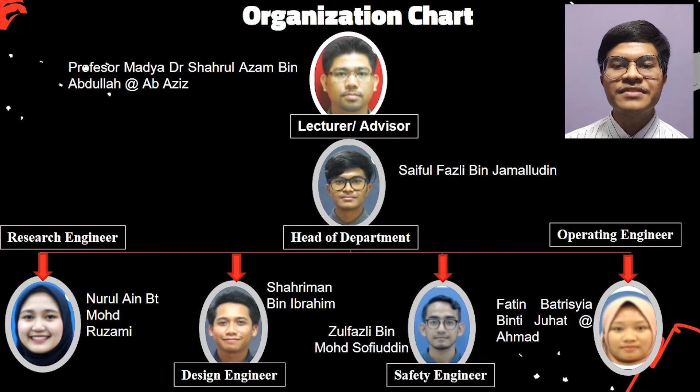I am Saiful bin Jamalludin as the head of the department. Nurul binti Muhammad Ruzami as research engineer, Shahriman bin Ibrahim as design engineer, Zulfazli bin Sofiuddin as safety engineer, and Fatin Batrisyia binti Juhat as our operating engineer.

Okay, I will explain briefly the job scope of every department. As the head of the department, I need to distribute the work among the members and assist them to follow the Gantt chart, so the work runs smoothly.

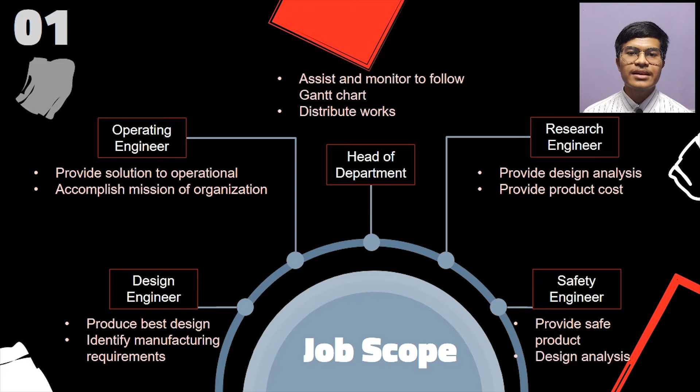Next, the research engineer needs to provide design analysis from the chassis and its production cost. For the safety engineer, he needs to ensure the chassis is safe to use by always monitoring the design analysis. Design engineer needs to identify manufacturing requirements and produce the best design for the chassis. Lastly, the operating engineer needs to provide solutions to operational issues and accomplish the mission of the organization.

Hi, my name is Ain and I would like to share about our chassis. For the selection of material, we are using mild steel as it is most used for terrain-use vehicles like ATV. Meanwhile, as for the design of the structure, the chosen design is selected out of 3 choices. The evaluations were done based on the characteristics, as the best design has the highest mark.

After that, our part has a good safety system as the main focus, which means the durability of the structure is really important in producing the best chassis for agriculture use. As it becomes the main part, it must be able to support others excellently without disturbing other components from functioning properly. Then our chassis is able to withstand obstacles as it will face different terrains which require it to be strong and durable.

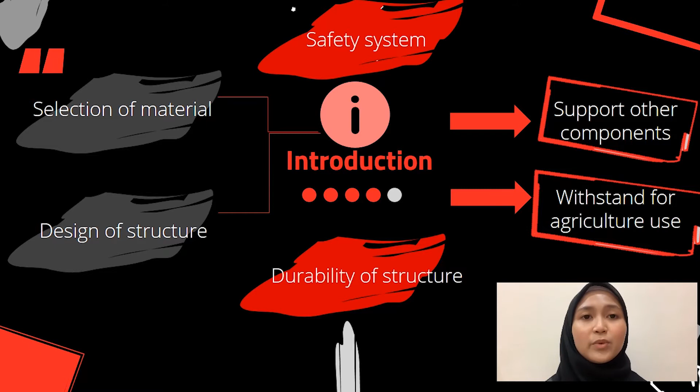So it is clearly stated that the user has a problem choosing the best design and finding the best material. Besides, the problem for this project is that the cost for making the part may exceed the placed budget along with all the required characteristics for the best chassis.

Therefore, the purpose is to allow for terrain use which is strong and suitable, for maximum yield strength, which is 2.2 times 10 to the power of 8.

Most of the users are from the baby boomer generation. Since they are more exposed to a high risk of getting injured, the safety of the product has become their main priority. So our chassis is the most suitable as the safety factor is more than 3, which promotes high safety to the user.

Next, the modulus of elasticity for our chassis is 210 GPa, which can support others greatly and can withstand high loads with very small deflection.

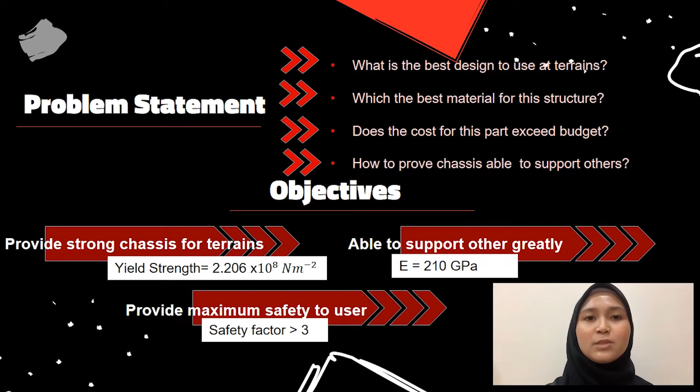Hi, Assalamualaikum. My name is Zulfazli and I am here to talk about our benchmarking based on the criteria needed for a perfect ATV transplanter chassis. So these are the designs we generated.

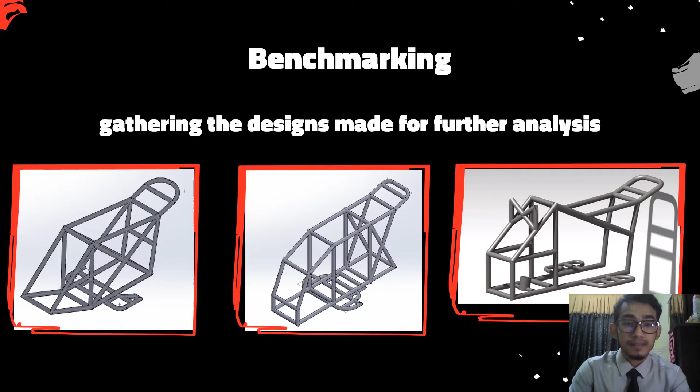Let's break this down quickly. The first one is much easier to fabricate and much lighter compared to the others. Design number 2 is more aesthetic and rare since it is one of a kind, and has a medium number of parts to weld, so it is not too complicated.

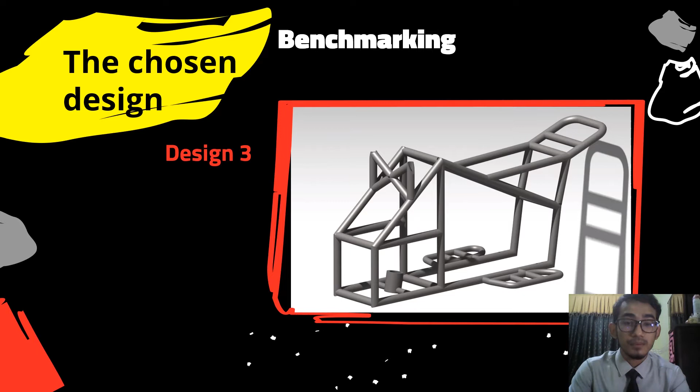Moving on to the chosen design, it has a long compartment and structured base to fit the engine in, making it more comfortable. It also has a pair of footrests to support that comfort point. Looking at the Pugh chart, the selected design scored massively, plus 17 points, by setting the important criteria as the datum. As the design usually outscored its rivals, we assume it is an easy choice.

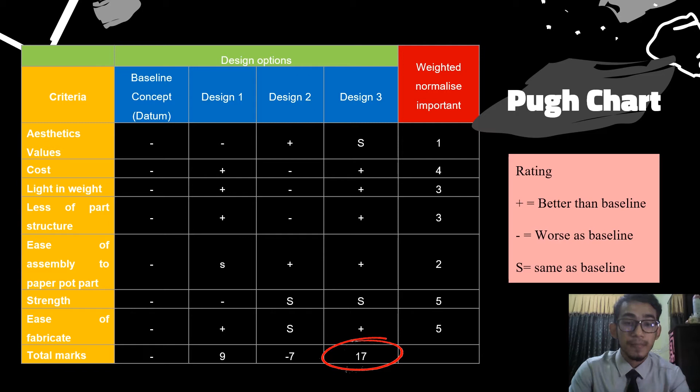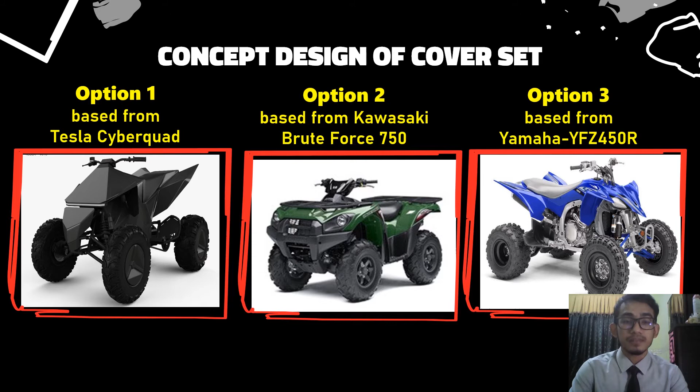The Tesla looks much more suitable for agricultural purposes, and with its simple design, it is also easier to fabricate, indirectly reducing the cost. The Kawasaki also has a sleek and sporty design, but they are much heavier compared to the others.

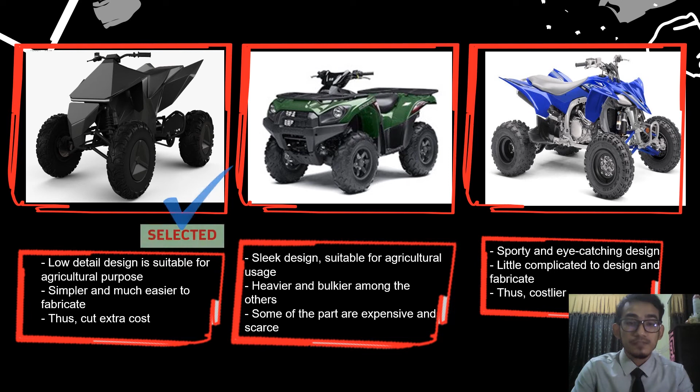The last one is Yamaha, which has a sporty design and looks very interesting, but this design is too complicated and will be much costlier to fabricate. So by that case, we've already made our decision and we are going with the best design of them all, which is the Tesla Cyberquad design.

This will be the conceptual design for our ATV transplanter cover set. Well, I think that's everything from me. Thank you.

For the product design specification, the chassis must be able to withstand forces used in terrain like agriculture use. The structure of the seat also needs to be ergonomic so workers can do the job for a long time. The cleanliness of the structure must be ensured to make the chassis maintenance-free and usable in the long term. For safety, the assembly for the chassis must be secured and able to withstand force when assembled with other parts.

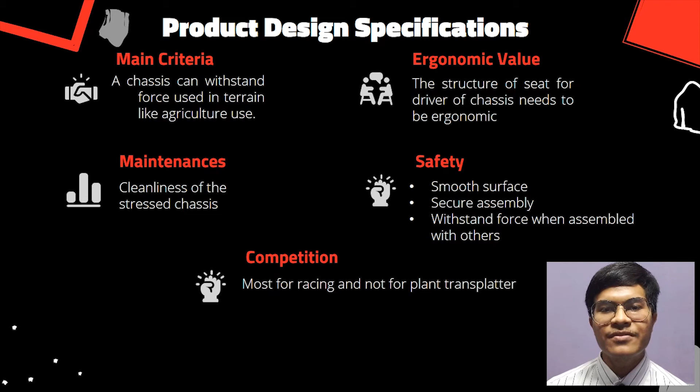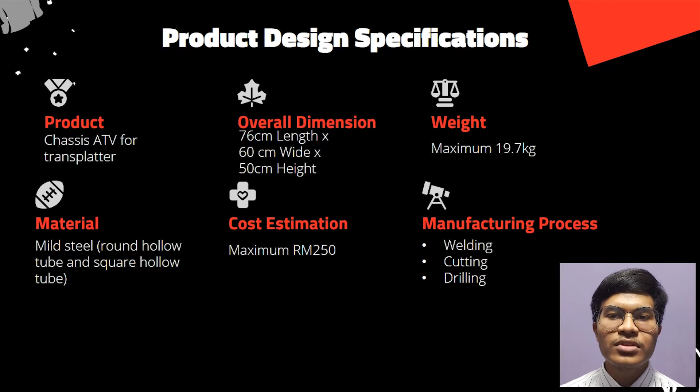For the competition, most ATVs are for racing purposes and not for transplanter use. The product produced in this department is the chassis for the transplanter with a maximum weight of 19.7 kg, dimensions of 76 cm length by 60 cm width by 50 cm height, and the material used is mild steel, round hollow tube and square hollow tube. Welding, cutting and drilling are the manufacturing processes, and around RM250 is the maximum cost estimation for the chassis.

Alright, I will continue our presentation for the next slide. Since my role for this project is design engineer, I will explain more about the design for the chassis.

First, for the stress analysis, we made a few analyses on this 3D chassis frame model to find whether this design is suitable enough for our ATV or not. There are 4 types of analysis conducted on this 3D model chassis frame: static analysis, impact analysis, turn left static analysis, and turn right static analysis.

All the analyses were conducted using SolidWorks software, since this software can give the best result and highest accuracy for the information needed among other 3D model design software. Furthermore, SolidWorks is also the easiest software to use since it is updated every year, so it's really up to date based on industrial needs.

For the weight of the chassis, in SolidWorks we can set the type of material to be applied to our product. We decided to choose mild steel since this material is strong and durable. By using the mass properties feature in SolidWorks, we finalized the weight of the designed chassis frame at 19.747 kg, which is around 20 kg conclusively.

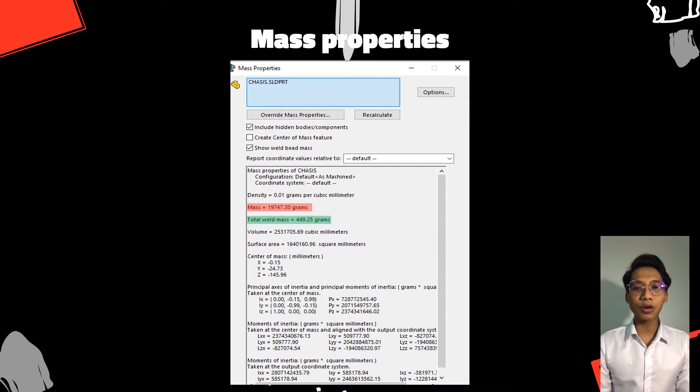By using mass properties also, we can find the total weight of weld bead produced from the welding process, which is 449.25 grams. This information can help us calculate the theoretical analysis for the chassis.

The first analysis conducted is static analysis. Basically, this analysis is to determine the critical part whenever the weight of the engine and rider are applied on the chassis frame. The fixed conditions are applied at the bottom points of the chassis, since it is the closest part to the ground.

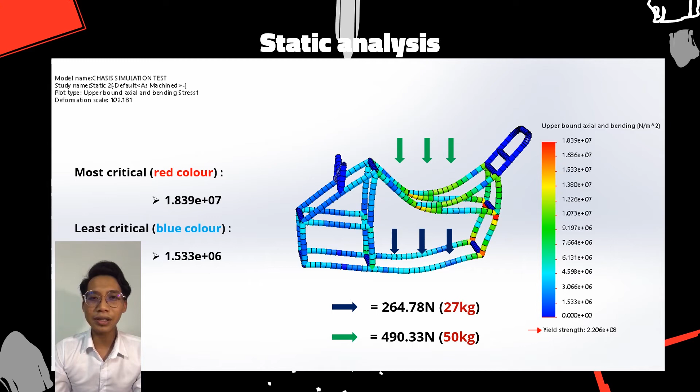The load of the rider and the engine are distributed at the seat and engine part, which are 490.33 newtons and 264.78 newtons respectively. The result shows that the area bounded by red color indicates the most critical stress, at 1.839 times 10 to the power of 7 newtons per meter square, while blue indicates the least stress, at 1.533 times 10 to the power of 6 newtons per meter square. Only around 5% of the total chassis part is at the critical point, shown in red.

The second analysis is impact analysis. Commonly, impact analysis is used to determine the critical part of the chassis involved whenever the ATV hits any obstacles from the front of the chassis.

The fixed conditions are applied at the front of the chassis to act as the obstacle, while the load distributed from the transplanter, which is 400 newtons, is applied at the back tail of the chassis. The result shows that the area bounded by red color is at the most critical part, at 1.152 times 10 to the power of 7 newtons per meter square, while blue indicates the lesser stress, at 9.599 times 10 to the power of 5 newtons per meter square. Only 5% of the chassis is at the critical point, indicating the critical part from the transplanter whenever force is applied.

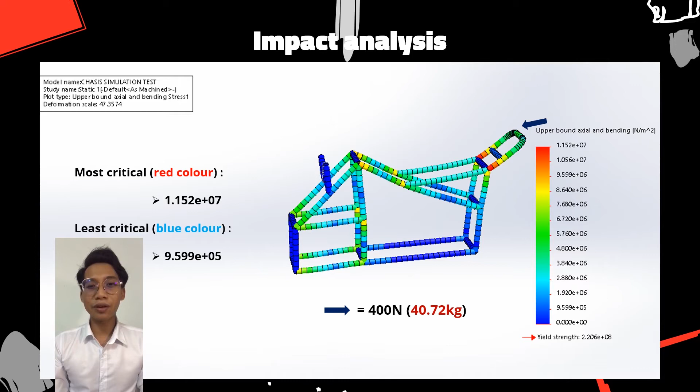Lastly is the turn static analysis. For the analysis, we perform two conditions: when the ATV turns right and when the ATV turns left. We assume 260 Newton force applied at both sides of the front chassis. The result for both analysis is quite similar since the design for both right and left side is the same.

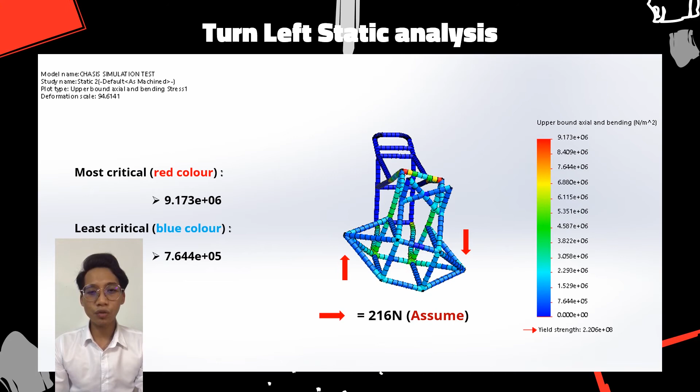For turn left analysis, the red color that indicates the most critical part is 9.173 times 10 to the power of 6, while the blue color indicates the least amount of stress, which is 7.644 times 10 to the power of 5.

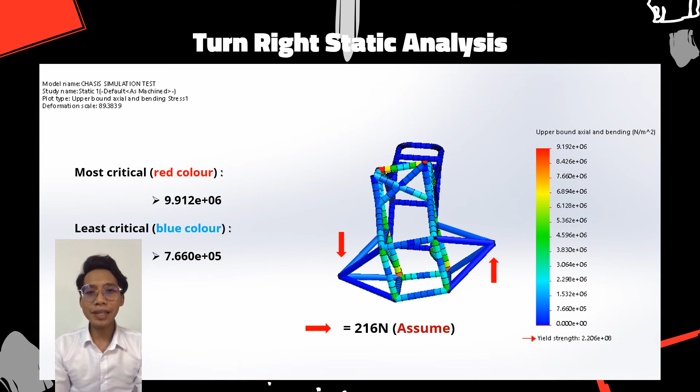For turn right analysis, the highest and critical point is at 9.192 times 10 to the power of 6 Newton per meter squared, while the least amount of stress is 7.660 times 10 to the power of 5. The yield strength of mass applied for all analysis is 2.206 times 10 to the power of 8. As a conclusion, all the analysis was conducted successfully.

Now we move to the calculations. We prove the ability of our product. It is assumed that the speed is 65 km per hour and the force is 193.257 Newton.

From here, the value of deflection is identified at a certain time and speed. Besides, we are able to obtain the work done and the allowable force before it fails. Now, the calculations are for two sides.

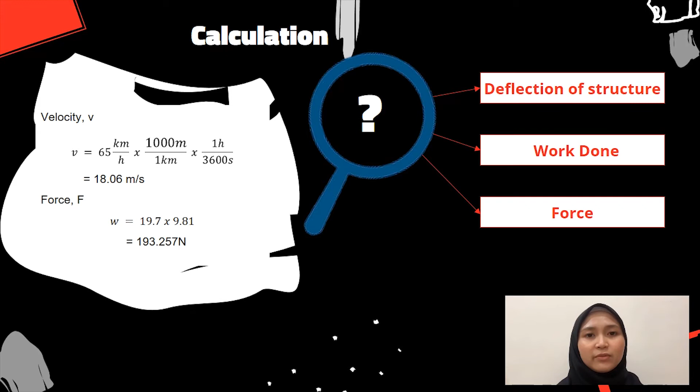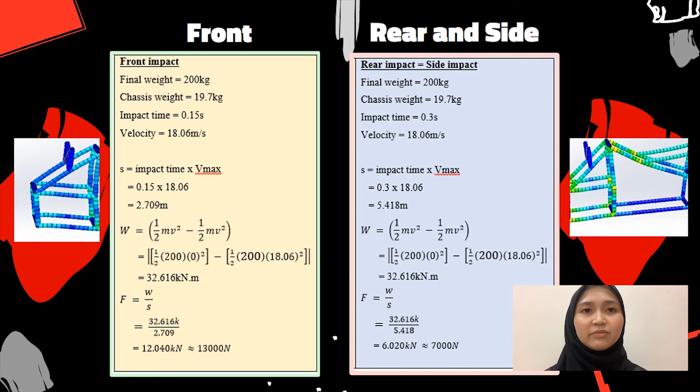The distance for it to deflect after maximum allowable force is applied to front impact is 2.709 meter and 0.15 seconds, while the side impact is 5.418 meter and 0.3 seconds. The work done for both sides is the same, which is 32.6 kN.m. However, the allowable force obtained for front is higher than side, allowing for more force to act on it.

For drawing of the components, I will explain each of the components part by part, starting with the full chassis.

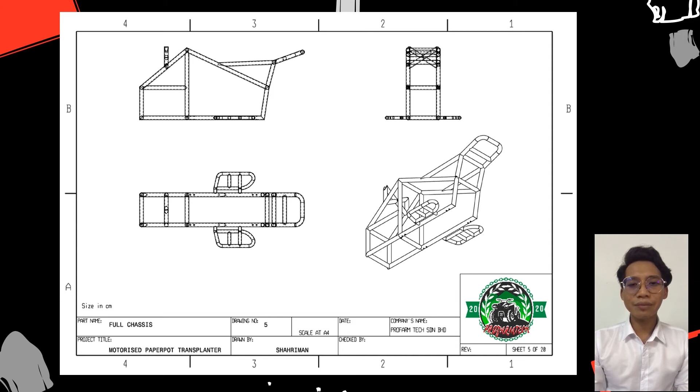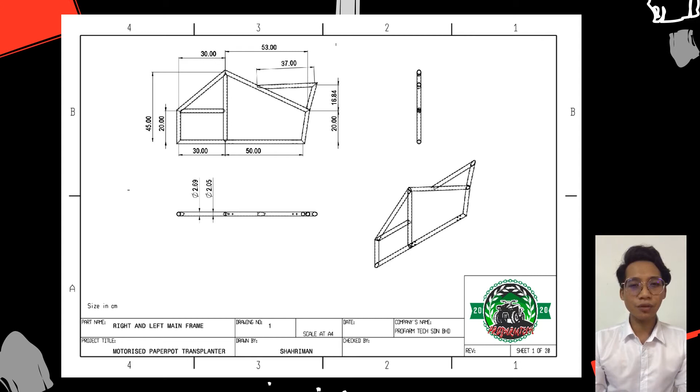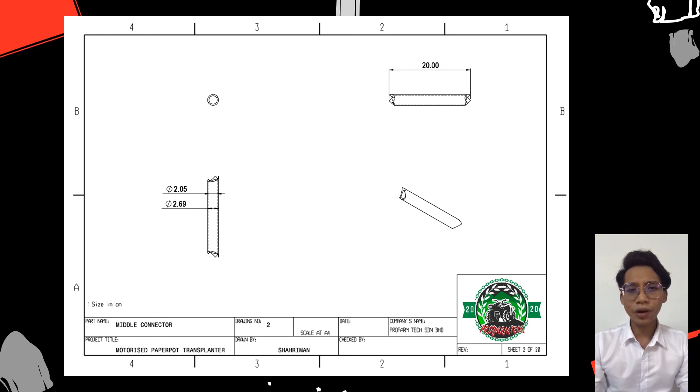It will be welded at the bottom of the chassis using arc welding or spot welding. We decided to make the footrests fixed to the chassis since this ATV will be used off-road and in extreme conditions, so it needs to be strong enough to stick with the chassis.

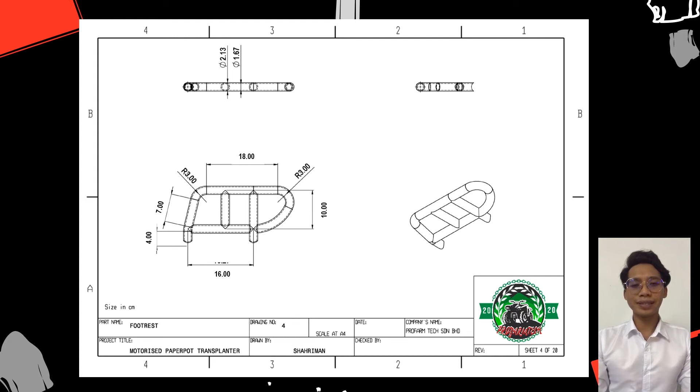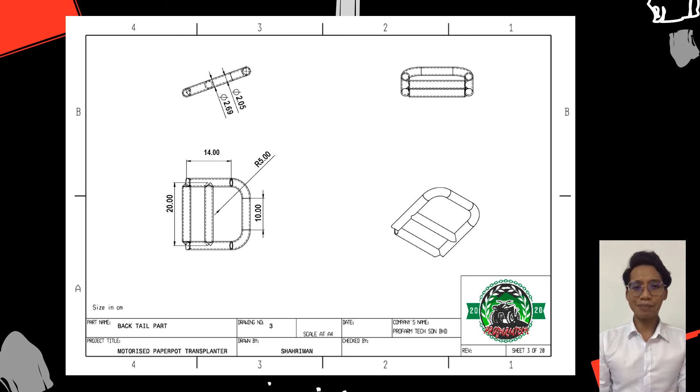This part will be the connector for the transplanter to the body chassis. We're still using the same hollow mild steel pipe as the main body chassis, which is 2.69 cm according to ANSI standard.

We move to the next slide, which is the drawing for the cover set. The first one is the front cover set. This part will be put at the front of the ATV.

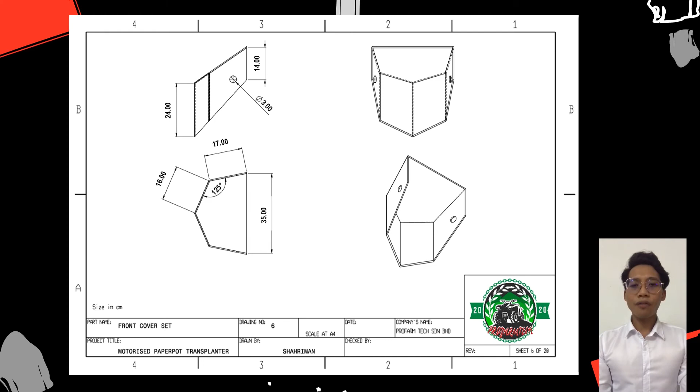The concept design for this cover set is from the Tesla ATV. The dimension for this part is according to the condition and position of the other parts assembled to the chassis. Lastly is the drawing for the middle cover set.

All the cover set parts will be assembled to the ATV by using brackets. The total weight for all cover set parts is around 7.56 kg only, since it is made from aluminium plate.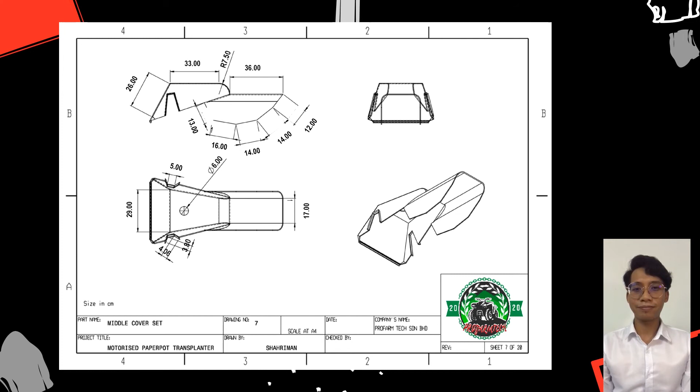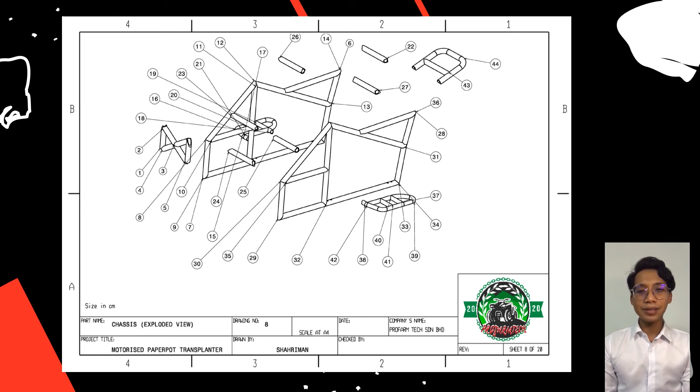The total number of components assembled to build this chassis is 44 parts, including the additional parts to connect the absorber and the main chassis.

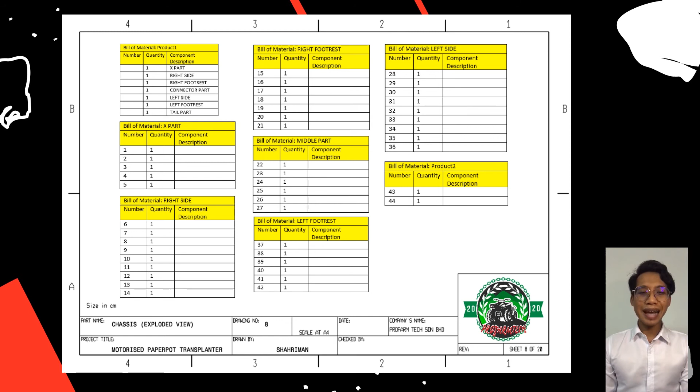This is the bill of material for our chassis. Bill of material can be defined as comprising all the assemblies and parts required to construct a product. So our bill of materials is based on the drawing of the exploded view shown before.

Assalamualaikum. I will explain about project costing for the chassis department. The main material for our chassis ATV is mild steel. It is because the availability of the material in the market is high. Moreover, the price for the mild steel is considerable for our budget. Despite that, its mechanical properties are suitable.

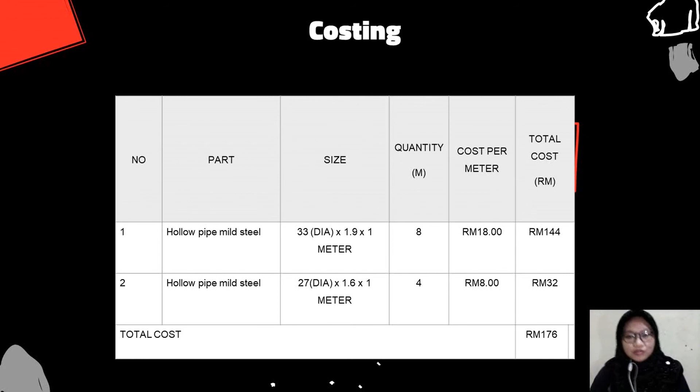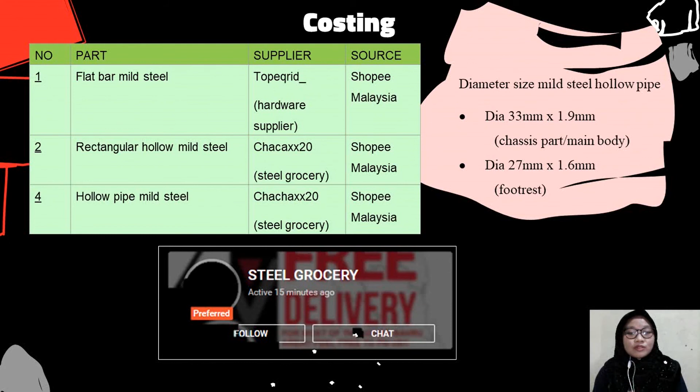This is an example page of the website that we surveyed. This is the overall cost for the chassis department. The indirect costs for the project are assembly, welding, cutting, grinding, and drilling.

Manpower for welding and assembly is set to 3 people because this process is quite complicated compared to other processes. Most of the fabrication process is done by the students, so the pay per hour was set to RM2.

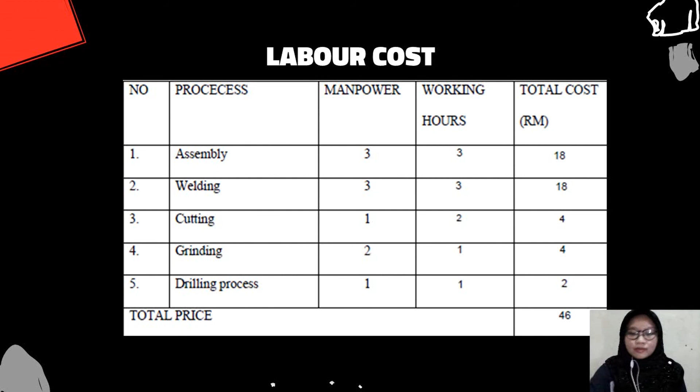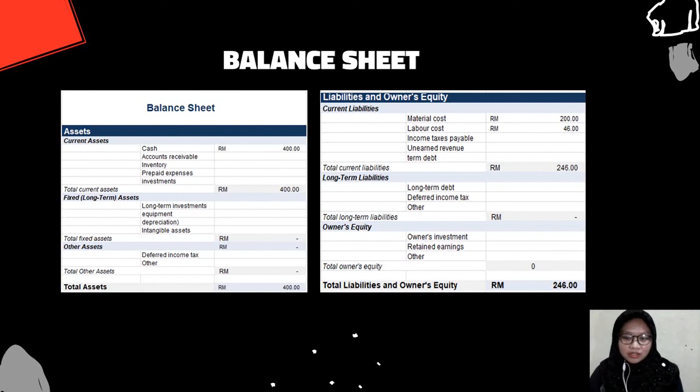Before we end our presentation, we will present our video of the fabrication process for our chassis. Please enjoy it.